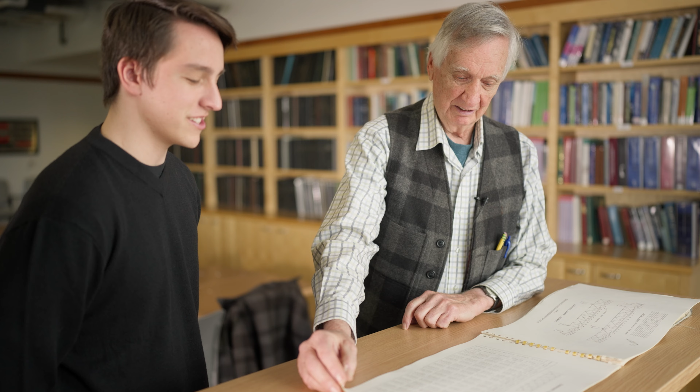I think I'm probably the last generation that's ever had that. The slide rule was replaced by the Hewlett-Packard calculator about 10 years into my profession. Gotcha. The slide rule went the way of the passenger pigeon.

As I go through this, I'm seeing that a lot of what we're doing today, and what you might see in your profession, is that we analyzed all this work with a book—work on the Seattle freeway, work on the Minneapolis freeway system—was all done out of this book. Really? This same total design book is now three AASHTO manuals. Oh wow, so it's very much more complex and much more computer.

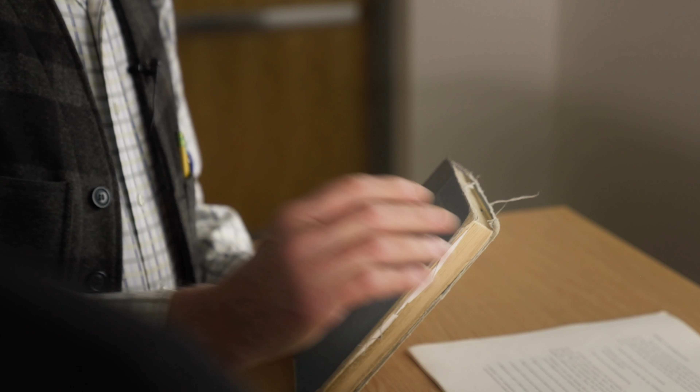And what I've emphasized with them is that it's important that you know some of the old methods, because a little bit of the intuition about engineering is being lost. It gets more scary for you young people when it's so complex and so specialized. Yeah, and I don't think that has to happen. I think there can be a bit of a meld between the two.

The system wasn't broken, but rather than fight the new system, I'm just saying pay attention to the intuition that you're learning in engineering. And don't get lost in the complexities or the dependence on the computer. Definitely—it just makes you less and less conversant with engineering over time.

My concern today is that intuition is dropping off the screen a little bit, and I actually think it's best for every engineer to be able to design from the ground up. That intuition is being set back a bit in my view.

But other things—the quality of the student and the quality of the student engineer that comes to us nowadays—is excellent, it's just super. But they don't have the intuition, and I think that's important, so they need to keep their ear open.

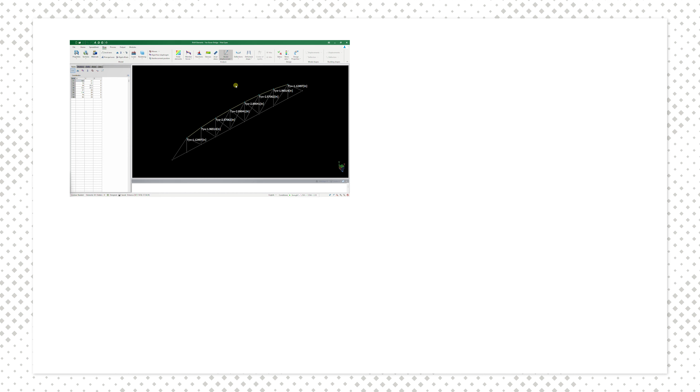In this module, we will explore structural design software, focusing on finite element analysis. This type of software makes it possible for engineers to quickly analyze complex problems and rapidly design members. It has revolutionized the way we design structures.

However, software use comes with the challenge of ensuring the validity of the analysis and design. This can be managed, but not without intention.

Finite element analysis is a numerical technique that breaks down the structure into small pieces, mathematically treats each of the pieces and how they interact with each other, and then puts it all together at the end with a solution for what the forces and stresses are in the members.

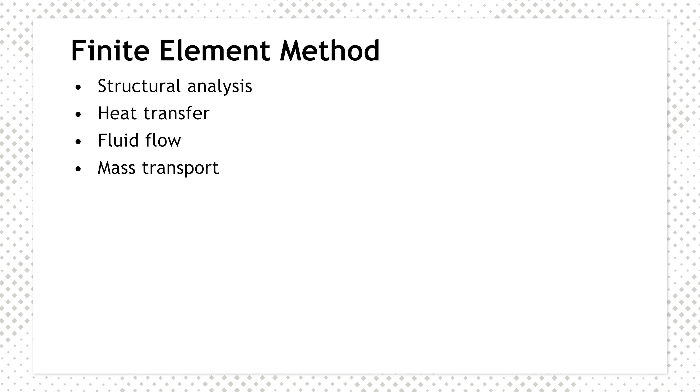The finite element method can be used for structural analysis, heat transfer, fluid flow, mass transport, and electromagnetic potential. In structural analysis, we use finite elements to determine displacements based on applied loading and stiffness. With displacement, we can solve for internal member forces and stresses, which can then be used to make design and evaluation decisions.

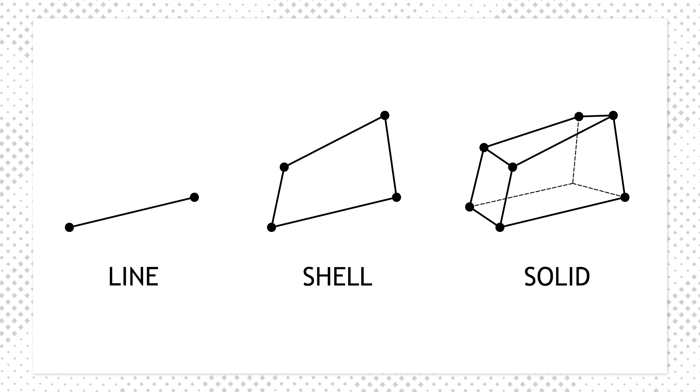Finite element analysis starts with nodes, which can displace in 3 directions and rotate about 3 axes. We connect these nodes with either line, shell, or solid elements. Linking 2 nodes generates a line element, which has 12 degrees of freedom, 6 translational and 6 rotational.

Linking multiple elements permits us to create structural models and understand how loads, stiffness, and displacements of the elements relate. It doesn't take many elements to generate a tremendous number of degrees of freedom. Hence, finite element analysis developed alongside the computer.

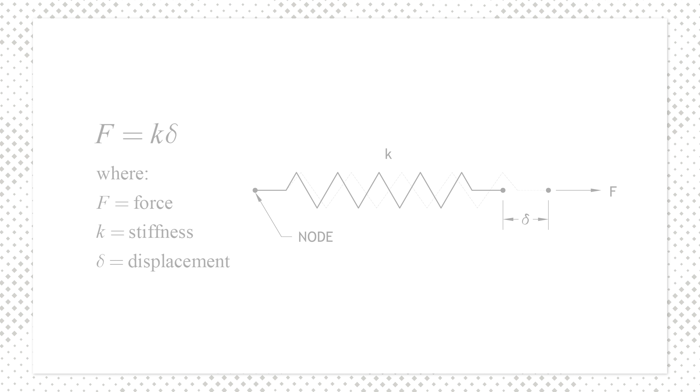The fundamental relationship in FEA is force equals stiffness times displacement, exactly like spring theory. Expanding this to multiple dimensions and any number of degrees of freedom, we can write this equation in matrix form. We do this for either one element or an entire system.

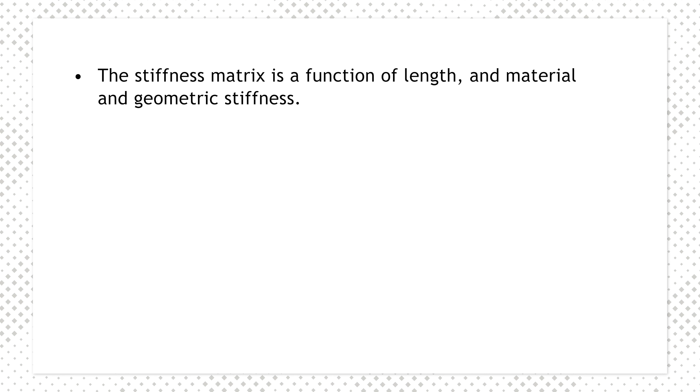The stiffness matrix is a function of length and material and geometric stiffness. Modulus of elasticity represents material stiffness for linear systems. Area provides stiffness for axial and shear actions, and moment of inertia provides bending geometric stiffness.

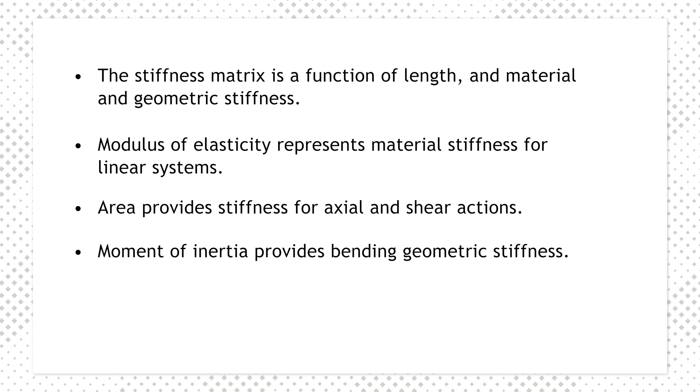Putting this together for a single beam element in 2 dimensions, we get the following relationship. The hat on the force and displacement vector indicates the element local axes.

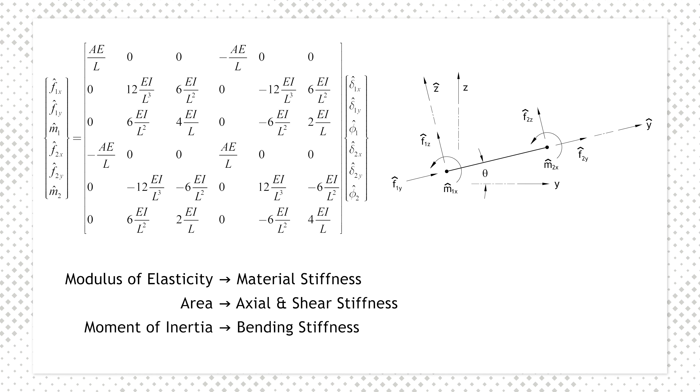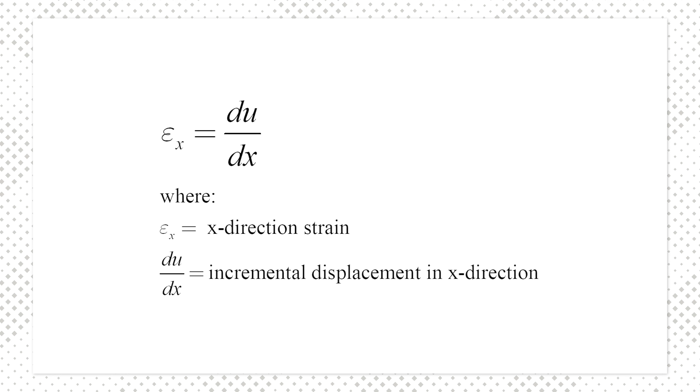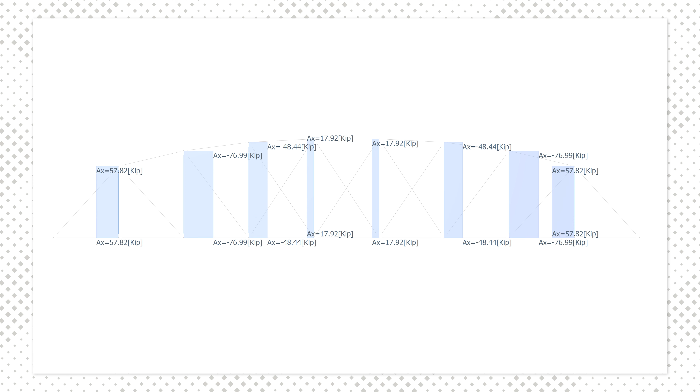One can begin to imagine how large this matrix gets for an entire structure. With a solution for displacement, we need a relationship to convert this to strain. For linear systems, we can use this equation. We then convert strain to stress using the mechanics of materials relationship. If we prefer, we can utilize the stiffness matrix and displacements to solve for the forces and moments in each element, then use these to design or evaluate the members.

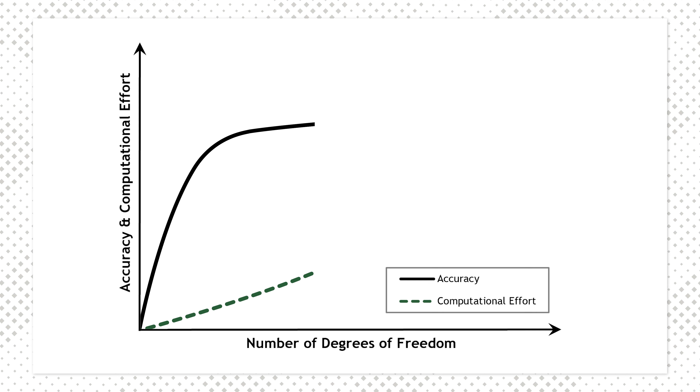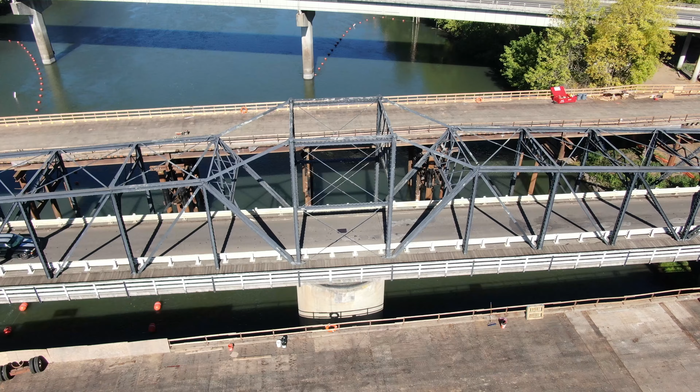The accuracy of a finite element solution increases as the model refinement or degrees of freedom increase. However, as we see in this chart, at some point increases in accuracy plateau, even with increasing degrees of freedom. It is therefore helpful for an engineer to balance accuracy with computational effort. One way to test this is to increase the number of degrees of freedom in the model and assess how much the results change.

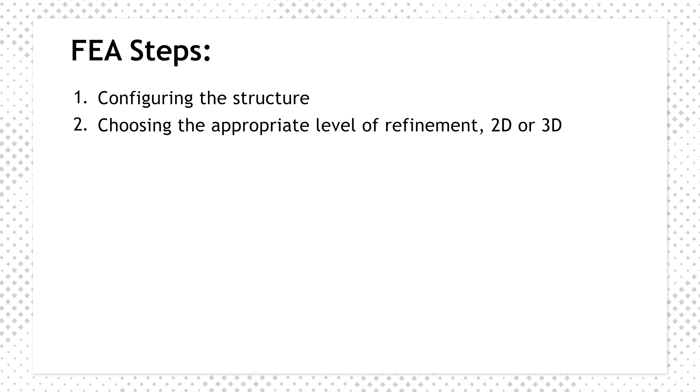Fundamental steps in utilizing finite element analysis software include configuring the structure, choosing the appropriate level of refinement, 2D or 3D, assembling the model, loading the model, analyzing the model and designing members, validating the model and results, and extracting usable results.

The Federal Highway Administration Manual for Refined Analysis in Bridge Design and Evaluation is an excellent resource for understanding what is known as refined analyses in the AASHTO LRFD Bridge Design Specification.

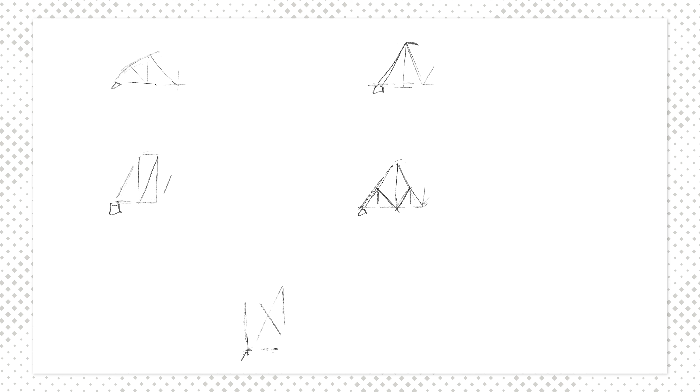A first step in creating a finite element model is configuring the structure. It is wise to start this step with sketches showing general concepts of what you want to accomplish. At this point, be creative and open-minded. Know that you will get to a final design, just not in one step.

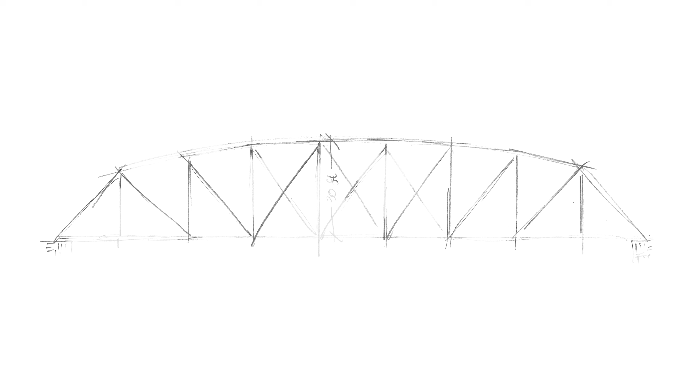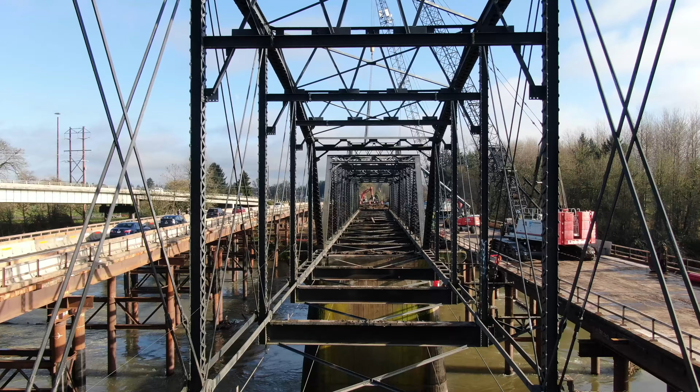So you can analyze the trusses in 2D by taking one truss panel and drawing it on a sheet of paper in an elevation view and solving for all the forces. In reality, the truss is a 3D space structure, and so you really have two of those panels and then connecting members in between. A true 3D analysis would analyze those two truss panels and all of the pieces in between using a finite element or a technique such as that.

With the 2D method, a designer would like to use it because it's rapid, it's quick, and they could get to what they need to know pretty efficiently.

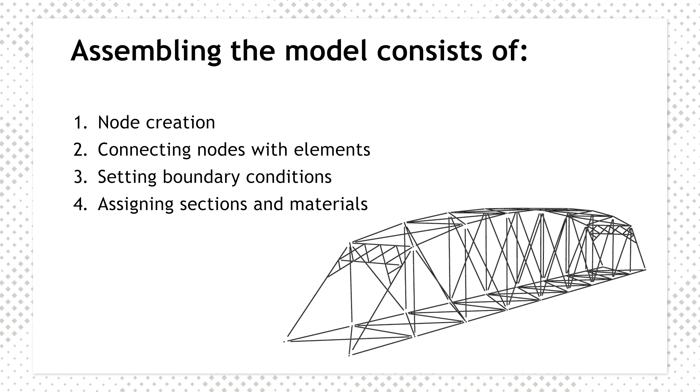Assembling the model consists of node creation, connecting nodes with elements, setting boundary conditions, and assigning sections and materials. A model can be assembled from scratch within the finite element software or imported from a CAD program. The latter often allows easier creation of complex geometries. This model utilizes RAM Elements, a commonly used finite element program in the structural engineering industry, though these steps apply to many structural design software packages made by a range of companies.

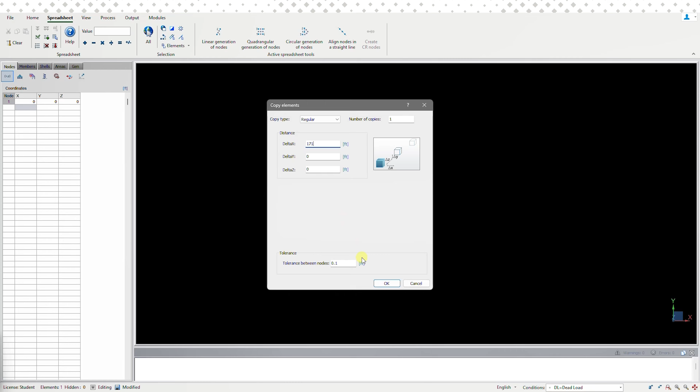We create nodes by inputting coordinates. Here's our first node. Let's copy the first node 171 feet in the x direction. This is the total length of the truss we are modeling. Here's the copied node.

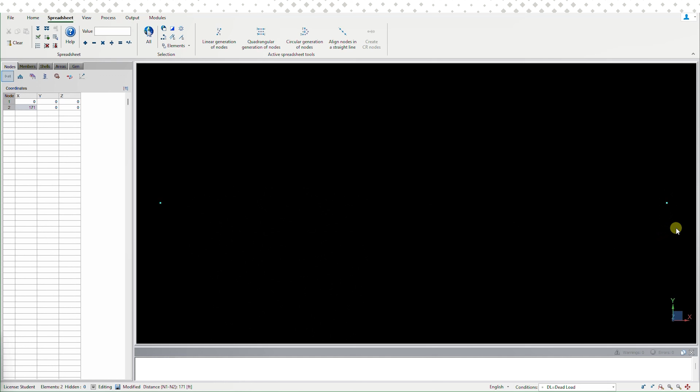Complex structural models can have hundreds of elements, so it's critical to learn how to create them efficiently. Using the linear generation tool, we can quickly fill this space. First, select two nodes. We'll place 8 equally spaced nodes here. We've now created all the nodes for the bottom chord of our truss. The software sequentially numbers each element as it's created.

We can turn on the nodal coordinates under View, Properties, to see the three-dimensional position of any node. Let's also turn on node numbering. Information only shows for selected elements, which turn blue.

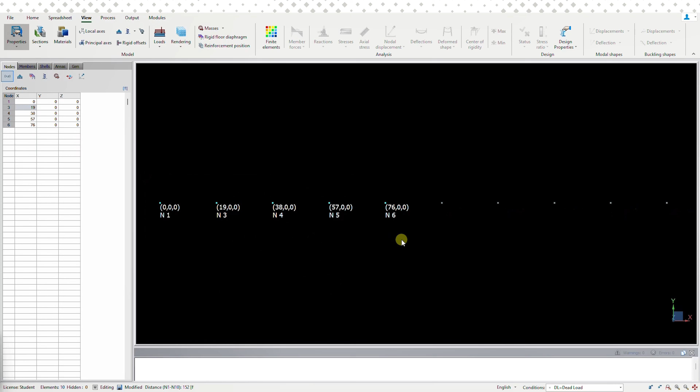We create line elements by selecting two nodes, right-clicking and selecting Connect Nodes with Members. We can also select an even number of nodes and choose Alternately Connect Nodes with Members. This works well for similar types of members and speeds up the modeling process. There are many modeling tools you can learn to quickly create elements. Continuing this process, we can create every member in the model.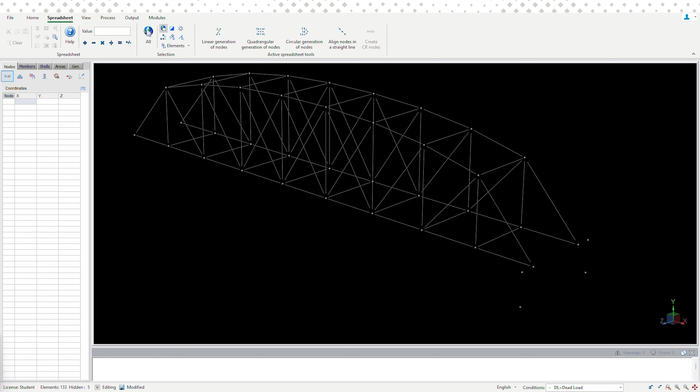Utilizing shells, let's create the abutment of the original Van Buren Bridge. I've already laid out the nodes at the corners of the abutment. Selecting the nodes in clockwise or counterclockwise order, right-click and choose Create Shell.

To get understandable results, we need to align the shell axes in the same direction. It can also help to align the local axes with the model axes when possible. We can do this by selecting the shell and using the rotation angle in the spreadsheet or using the tools along the top of the window.

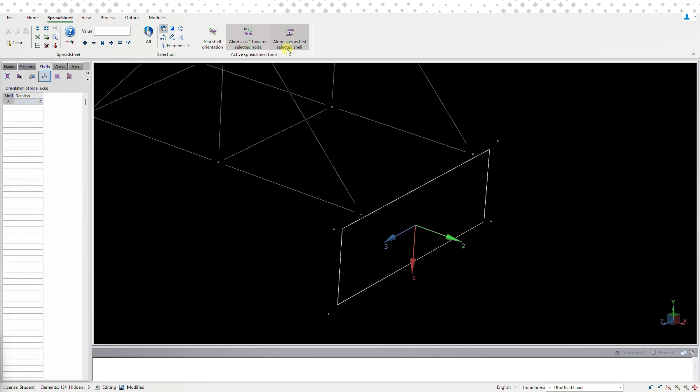The software will subdivide the elements when we select View Finite Elements. We can determine the maximum distance between nodes to control the mesh refinement.

If we want to control the mesh more, we can physically subdivide the shell by clicking on Shells, Nodes, Segment Shells. We can select how many segments we want in each direction.

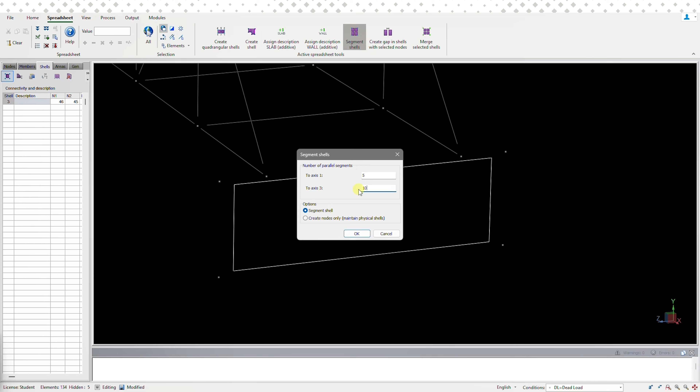With members and shells created, we need to assign boundary conditions. This tells the members how to interact with the world and one another. Any place a node touches the Earth, we apply a global boundary restraint. Recalling each node has 6 degrees of freedom, 3 translational and 3 rotational, we can constrain a node based on how it will be connected in reality.

In 2 dimensions, we can relate common connections to resulting analytical restraints. We see the roller resists vertical forces only, while the pin resists both vertical and horizontal force. The moment connection resists translation like a pin, but also restricts rotation.

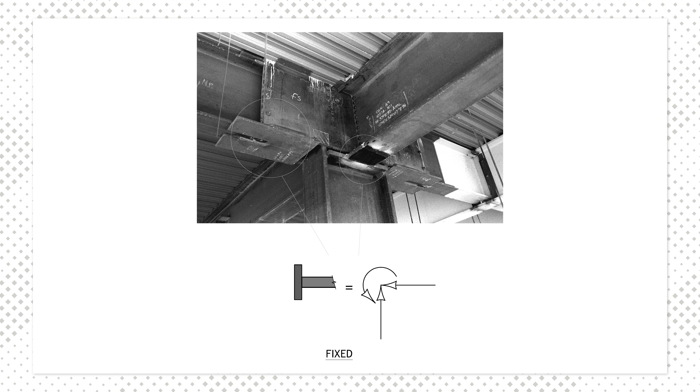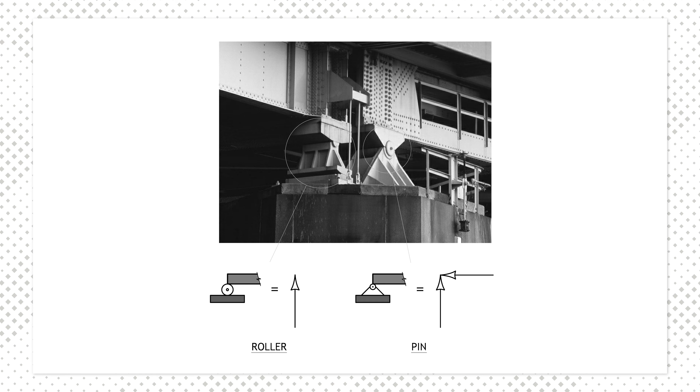These can be extrapolated to the 3-dimensional case. For the truss, it is pin connected on one end and roller connected on the other. This models reality and supports the truss vertically, keeps it from sliding horizontally, perpendicular to the span, and permits one end to slip for thermal expansion.

Starting with the left support node, we go to the restraints group of the node spreadsheet and select Pinned. Notice the graphical representation of the node being restrained in translation in the X, Y, and Z axes. Now select the right end support node and choose Roller in X. Notice how this node is now free to translate in the X direction.

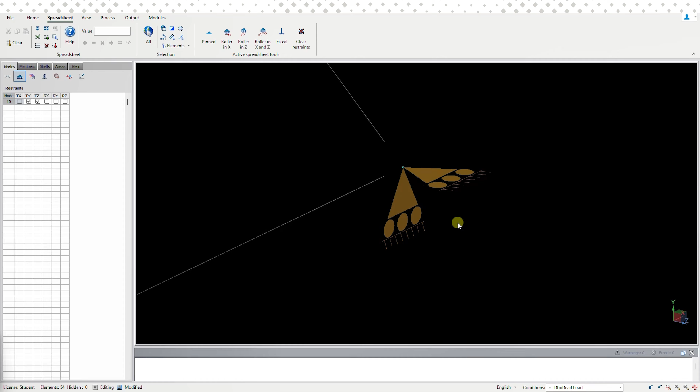For line member-to-member interactions, we can similarly assign 6 degrees of freedom to each end. For truss members like those in the historic Van Buren Bridge, the members behave more as pins than fixed connections. Hence, we will release moment resistance at each end.

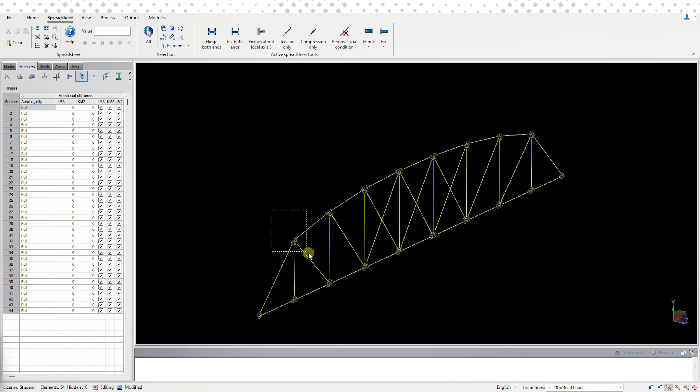We do this by selecting all the members, then under the Members tab and Hinges group, select Hinge both ends. This means the software will treat each joint as a pinned connection. We can fine-tune member end releases by double-clicking the checkboxes in the spreadsheet.

Keep in mind, if all members are pinned at a joint, we will get an instability. We can solve this issue by making sure one member at each node is not released.

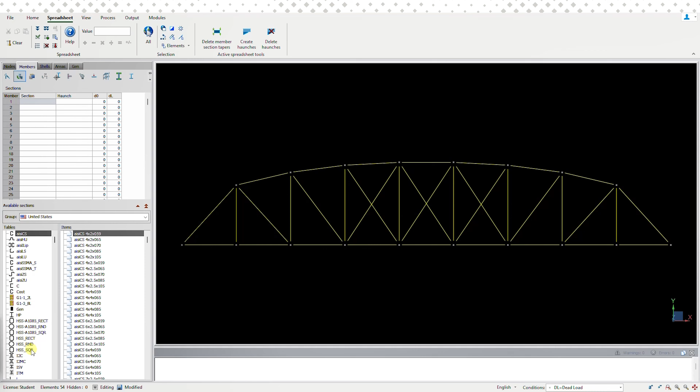After creating line elements, we next assign their section and material. Select one or more members and navigate to the Sections group of the spreadsheet. If we want to use hollow structural sections, we navigate to the HSS table and choose a member section.

Next, we go to the Materials group and assign a material. Hollow structural section is typically made of A500 grade C steel. In the View tab, we can toggle on member properties such as section and material.

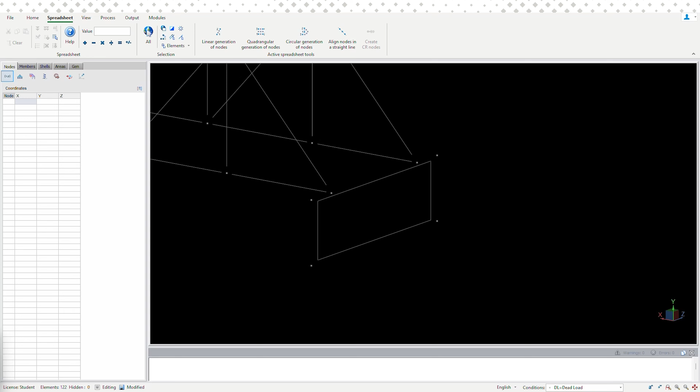For shells, we assign material, shell thickness, and reinforcing cover. Material is the third icon over under shells. We select the material by double-clicking the item we want. Note, C360 means 3000 psi concrete with 60 ksi rebar. We can assign the mechanical cover for concrete in this tab as well.

We assign shell thickness by selecting the second icon over and type in the thickness we want.

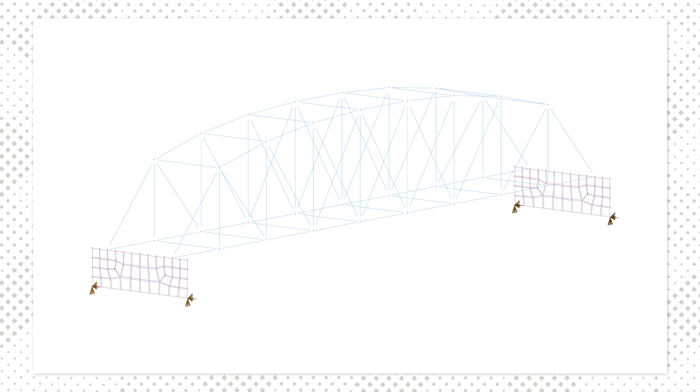With the model now configured, we are ready to apply loading. It is most effective to apply the loads unfactored, just as they are calculated from the code. This provides simplicity and flexibility when assigning load combinations.

We first create individual load cases corresponding to the load types we have on this project. For now, let's create dead components and dead wear.

To assign point loads for dead wear, choose it in the Conditions dropdown. Select the nodes where we want to apply this force and go to the Nodes, Forces, and Moments spreadsheet. Type negative 6.08 kips for the force in Y. Remember that we found these forces in Module 3.

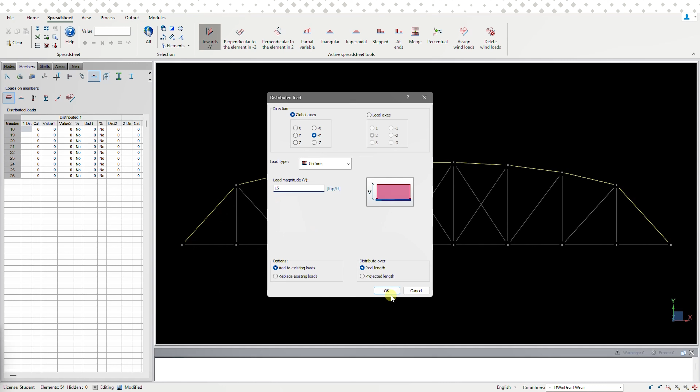To assign line loads, follow the same process. Select the members and choose Members, Loads on Members. Click towards negative Y to assign a uniform downward force along the member length. We do this for each load case in every portion of the model.

We next need to tell the software how to combine these loads. Opening the Add Edit tool in Load Conditions, we see that here we can define load cases and load combinations. Utilizing the AASHTO load combinations, we create a load combination for each case and enter the load factor in the combinations portion of the spreadsheet.

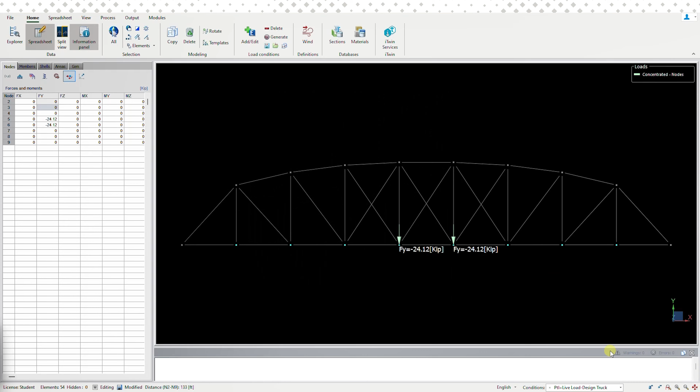We enter the load factor in the combinations portion of the spreadsheet. We can select any load combination in the conditions list to view each load that will be applied.

Now we run the model solver. In the Condition tab, select which load condition to include in our analysis. In the FEM tab, we can choose to segment members and shells.

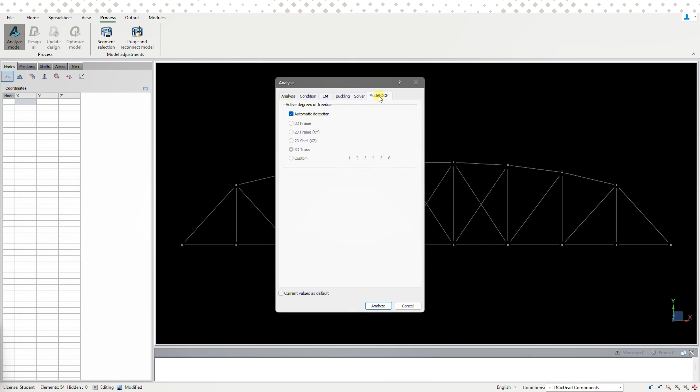We usually don't change anything in the Solver tab, but can as needed. The Model DOF tab allows us to assign how many degrees of freedom to analyze. We'll leave automatic detection selected. When analyzing a planar truss, the software will automatically decide that a 3D truss analysis should be performed.

Depending on the complexity of the model, the analysis may take seconds to hours or even days. The software completes the analysis of our truss in about a second.

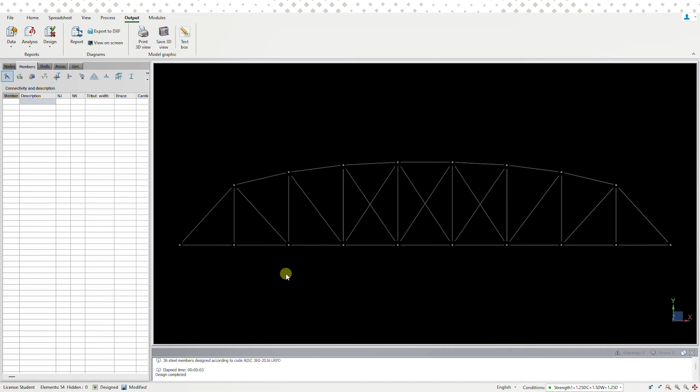With the analytical results, we can now utilize the software to perform the appropriate code checks. We can choose which steel, reinforced concrete, and wood codes to check our members. After the design module runs, the software will show us if our members pass the code checks and other results, like stress ratio. We can also see detailed code check results by clicking Output, Design, Steel.

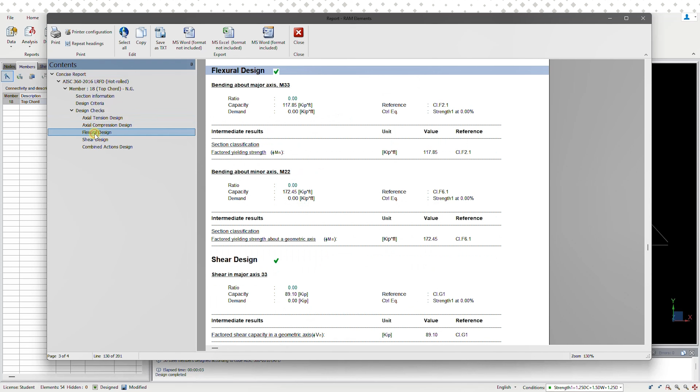We can now extract analytical results such as nodal and member displacements, member forces, shell forces or stresses, and modes of vibration. This can provide information for substructure design, connection sizing, how far elements move, and insight into the dynamic behavior of the structure. Let's walk through how to display these analytical results.

We'll use the options in the View tab. To see the calculated support reactions, select both support nodes. In the View tab, toggle on Reactions. Select nodes and toggle on Nodal Displacement to see how far nodes move under load.

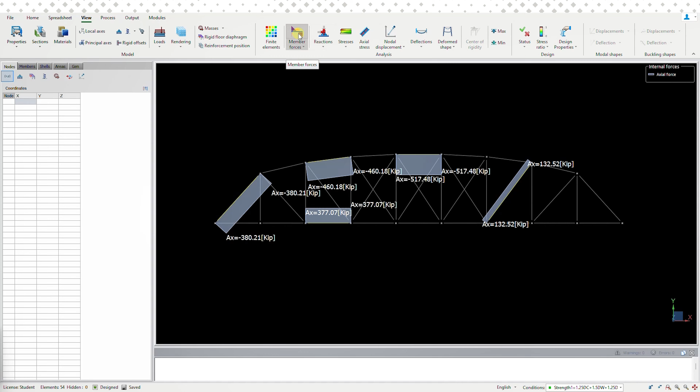To see internal member forces, select Members and choose Member Forces. We can choose to display axial force, shear, torsional moment, and flexural moment.

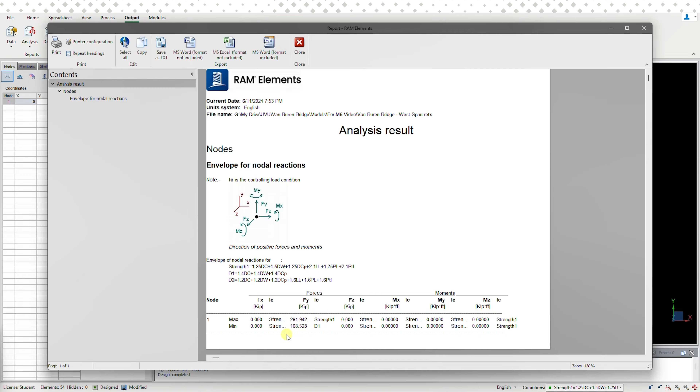We can also generate reports that tabulate these results. In the Output tab under Analysis, we find Analysis Results. Here we can generate various reports for nodes, members, and shells. It's very helpful to generate an envelope report, which shows maximum and minimum forces and which load combination caused that force. Validating the results of finite element analyses, this goes back to that engineering judgment issue.

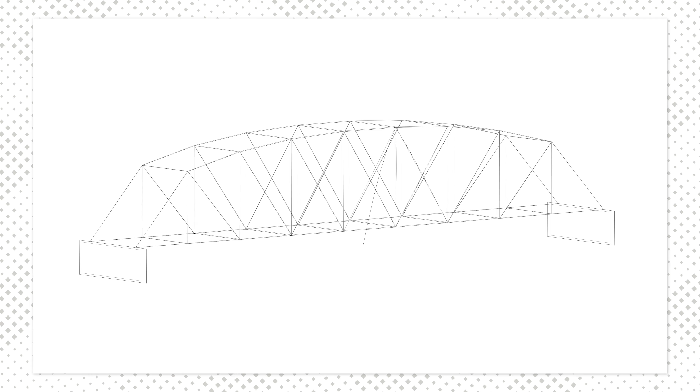They really need to understand all of the boundary conditions in the model and the loadings, and have an idea of some of the places where they can test what the model did and see if it's reasonable or not. Sometimes they might look at a deflected shape, for instance, and see it doing something weird and then go back and find an error. It is now critical to validate the model results.

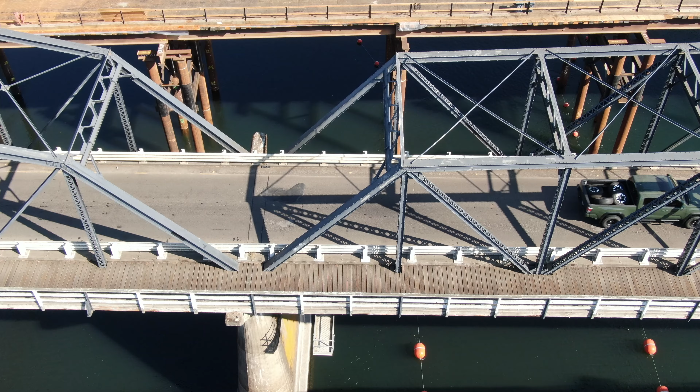A simple mistake can yield useless results. There are a number of ways to do this, and include comparing model results to exact or approximate equation-based solutions, observe the deflected shape and decide if it is logical.

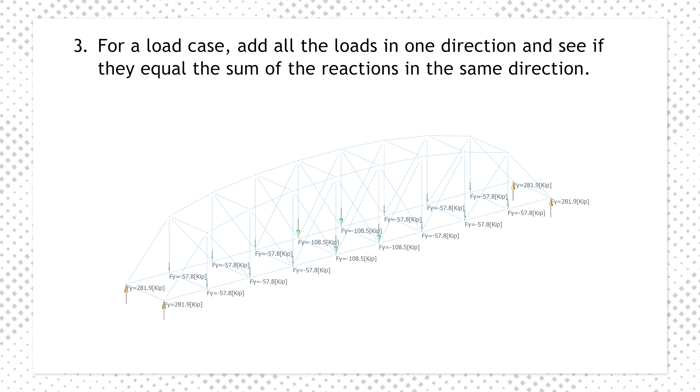For a load case, add all the loads in one direction and see if they equal the sum of the reactions in the same direction. Start with a more simple model and compare the results of a more developed model against it. For the truss model, we can compare the exact method of joints or method of sections to the FEA results.

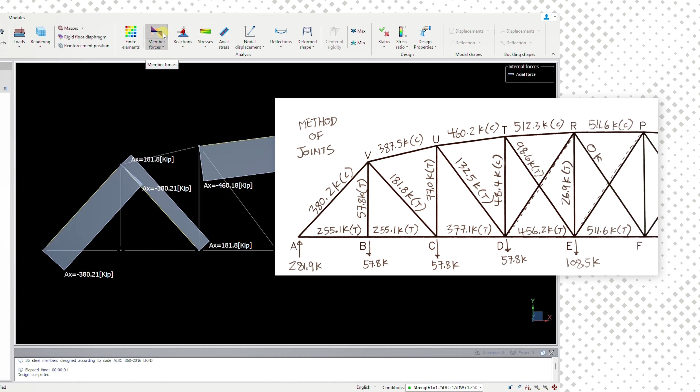After analyzing our truss, let's select a few members and toggle on axial forces. Positive values represent tension, negative represents compression. Comparing these values to our method of joints from Module 4, we get the same values.

Let's also check the reactions against our hand calculations. These match our Module 4 work as well. This gives us confidence in our truss model and the resulting analysis.

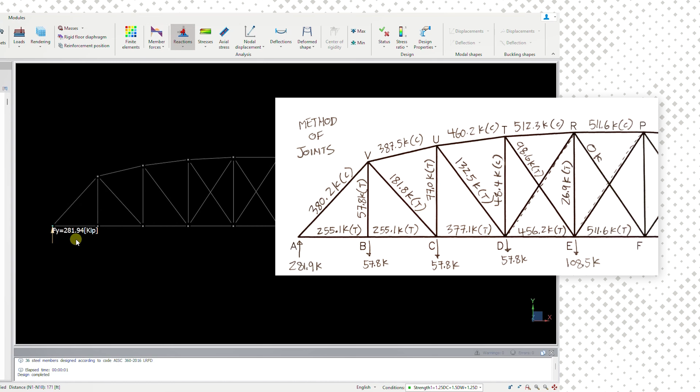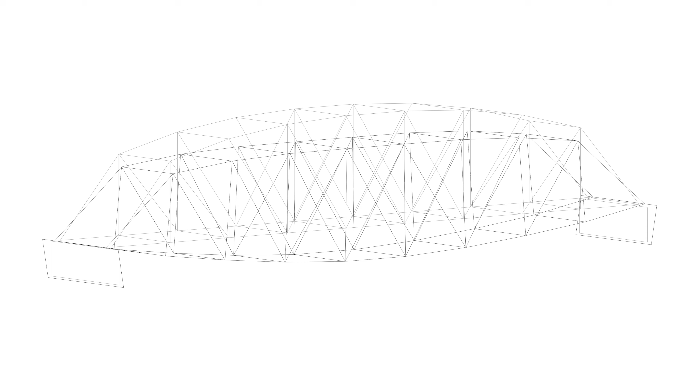Challenges with FEA software would include some of them are formulated differently than others, and so there may be some better accuracy or precision in some than others. The biggest one, though, is the user. The user has to know, has to have a feel for whether it's producing reasonable results or not. I guess you could call that engineering judgment, probably, but that is vital in using finite element.

Otherwise, it turns into a black box, and you really don't have something you can rely upon. The thing is, it's so complicated. You're talking about a model with tens of thousands of elements.

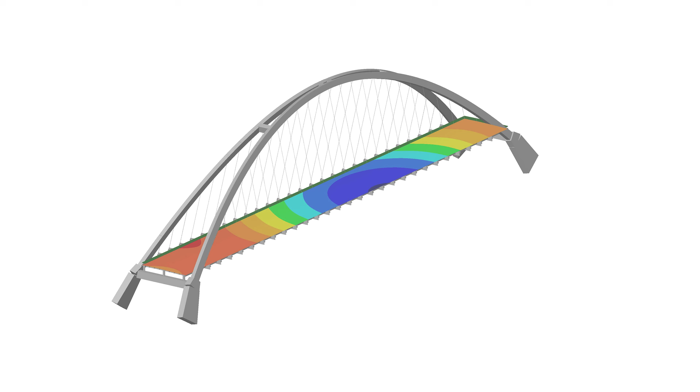He may be right. I fear sometimes that he is. But then I also see some really brilliant young folks come out of college who are over it and who get it. And so that gives me hope.